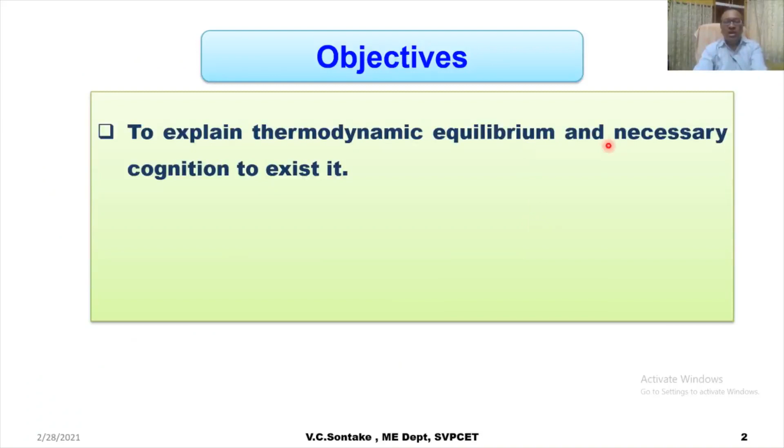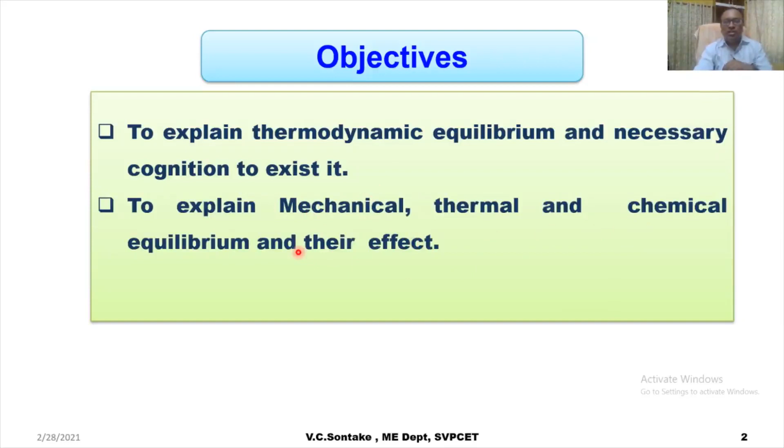The objectives of this video lecture are to explain thermodynamic equilibrium and the necessary condition for it to exist, and to explain mechanical, thermal and chemical types of equilibrium and their effect on the properties of a thermodynamic system. So let us start with thermodynamic equilibrium.

Now, before going into the detail of thermodynamic equilibrium, let us talk about the worldly meaning of equilibrium. In a simple sense, equilibrium implies a state of balance or no conflicts. For example, spiritually, when our heart, mind, body, and soul are all in a state of balance, the human being feels great peace because there is no conflict between these subconscious objects of the body.

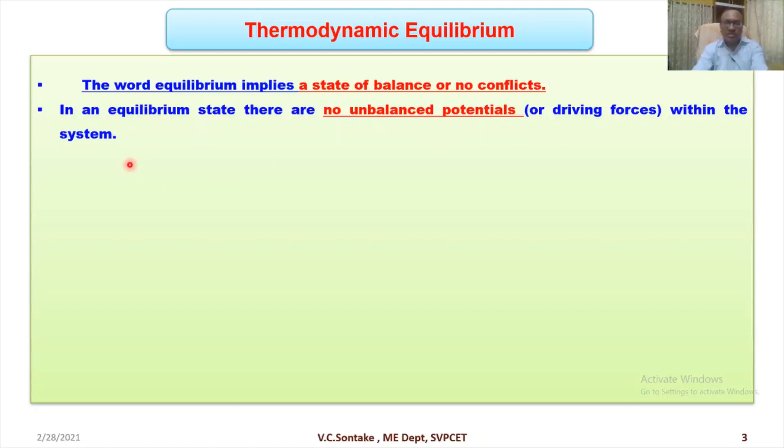So when I say equilibrium, it is a balance, no conflicts, nothing contradicting each other in that particular state. So in an equilibrium state, there are no unbalanced potentials or driving forces within the system, particularly a thermodynamic system.

A thermodynamic system exists in thermodynamic equilibrium when its macroscopic properties do not change if the system is switched from its existing state. That is, when it is moved or deviated from its existing state and no change in the macroscopic properties is observed, the system is said to exist in a state of thermodynamic equilibrium. Here, macroscopic properties are the properties which are observable in characteristics.

Thermodynamics particularly deals with the study of thermodynamic systems or different processes only when they exist in equilibrium states. Thermodynamics studies properties of those systems that are in equilibrium states only. The moment thermodynamic equilibrium does not exist, thermodynamic studies will not come into the picture.

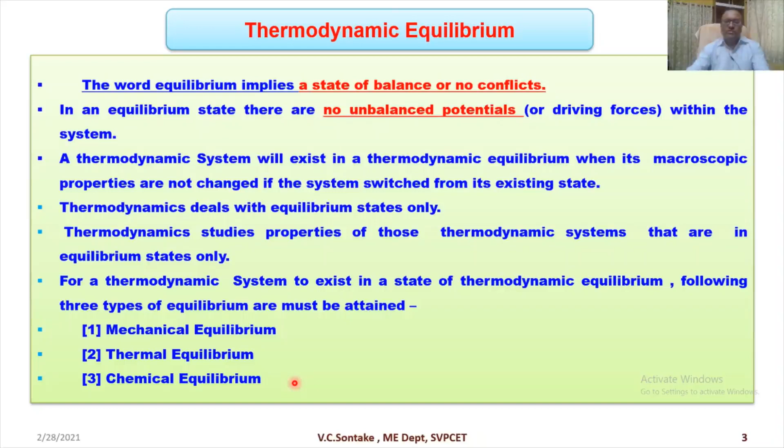For a thermodynamic system to exist in a state of thermodynamic equilibrium, three types of equilibrium must be attained: mechanical equilibrium, thermal equilibrium, and chemical equilibrium. A system is in thermodynamic equilibrium only when these three conditions are achieved. So let us discuss each type of equilibrium one by one. The first one is mechanical equilibrium.

In mechanical equilibrium, there are no unbalanced forces within the system itself, between two different systems, or between the system and its surroundings. If they are subjected to similar forces, with no unbalanced force, they are said to exist in a state of mechanical equilibrium. The pressure is the same at all points in the system, between two systems, or between system and surroundings, and does not change with respect to time.

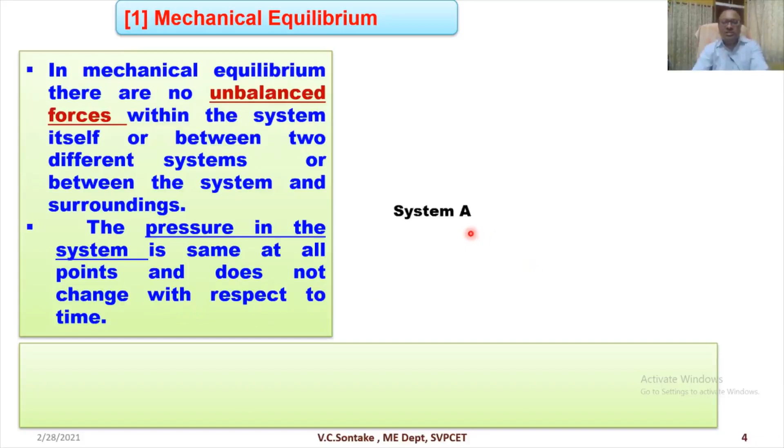For example, consider a system A where the pressure at different parts is 20 bar. So system A is in mechanical equilibrium. Similarly, if the parts of system B are at the same pressure, say 20 bar, it is also in mechanical equilibrium. If we bring A and B together, since pressures are the same, both exist in mechanical equilibrium. If they are exposed to surroundings at 20 bar, system A, system B and the surroundings will all be in mechanical equilibrium.

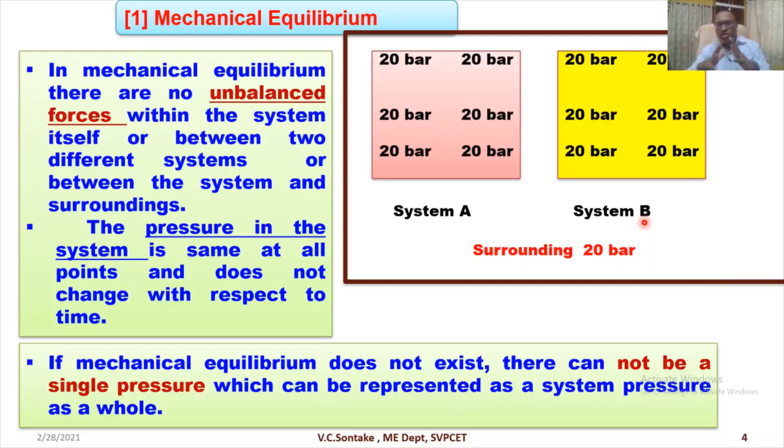Now what happens if mechanical equilibrium does not exist? Under such a condition, the system and surroundings or two different systems will be subjected to different pressures, and there cannot be a single pressure value representing the system pressure as a whole. There will be different pressure values.

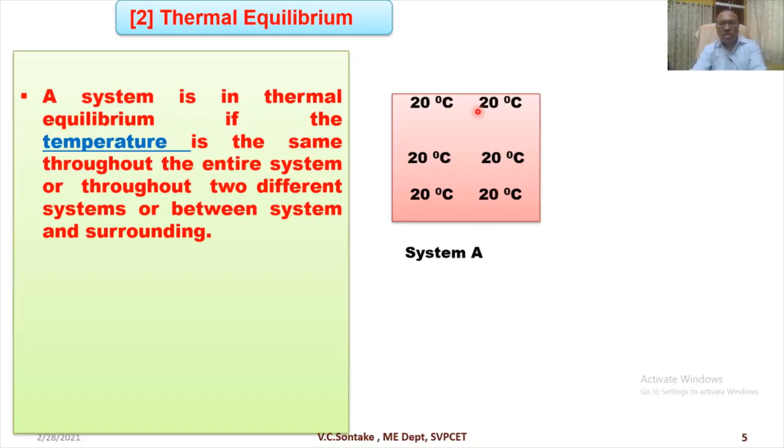The second type of equilibrium is thermal equilibrium. A system is in thermal equilibrium if the temperature is the same throughout the entire system, throughout two different systems, or between system and its surroundings. For example, in system A, the temperatures of different parts are the same at 20 degrees Celsius, so it is in thermal equilibrium with itself. If the parts of system B are at 20 degrees Celsius, it is also in thermal equilibrium with itself.

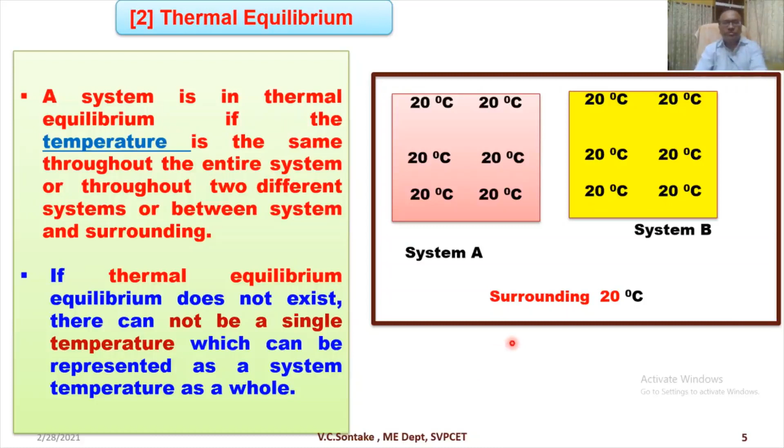System A and system B are also in thermal equilibrium, and if both are exposed to surroundings at 20 degrees Celsius, all three will be in thermal equilibrium. If thermal equilibrium does not exist, there cannot be a single temperature representing the system temperature as a whole; there will be different temperatures under thermal non-equilibrium. Now the last one is chemical equilibrium.

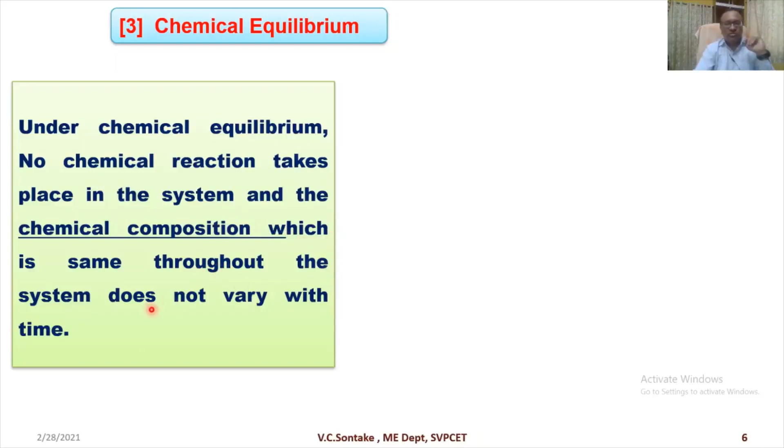Under chemical equilibrium, no chemical reaction takes place in the system and the chemical composition does not change and remains the same throughout. For example, if the chemical composition of system A is everywhere 20% by mass or by volume, it is in chemical equilibrium. If system B has the same composition everywhere, it is also in chemical equilibrium, and A and B are in chemical equilibrium with each other. If exposed to surroundings of the same composition, all three will be in chemical equilibrium.

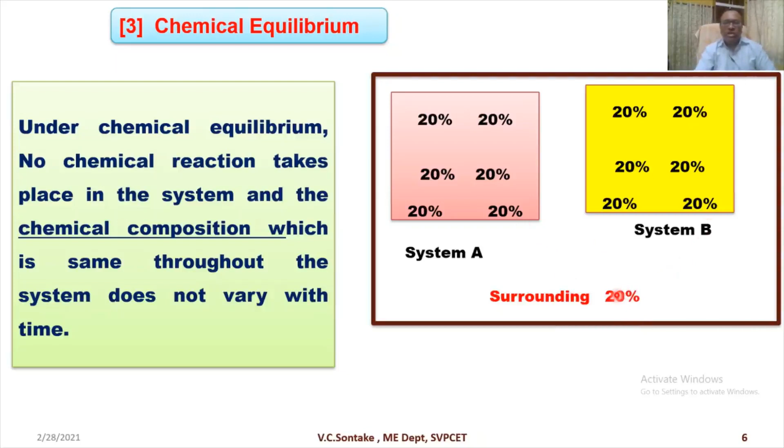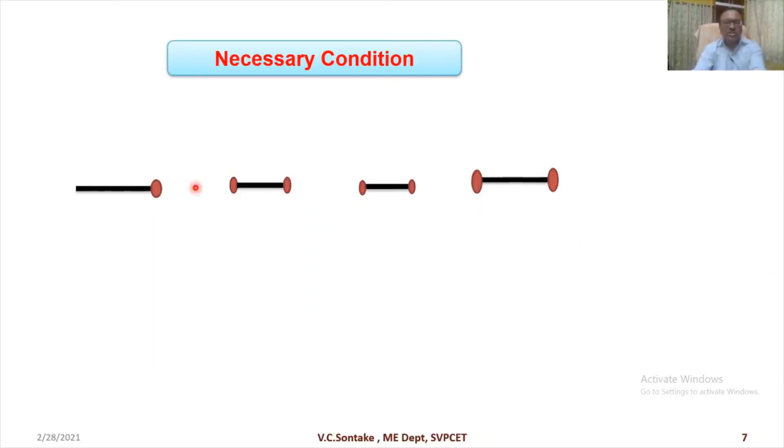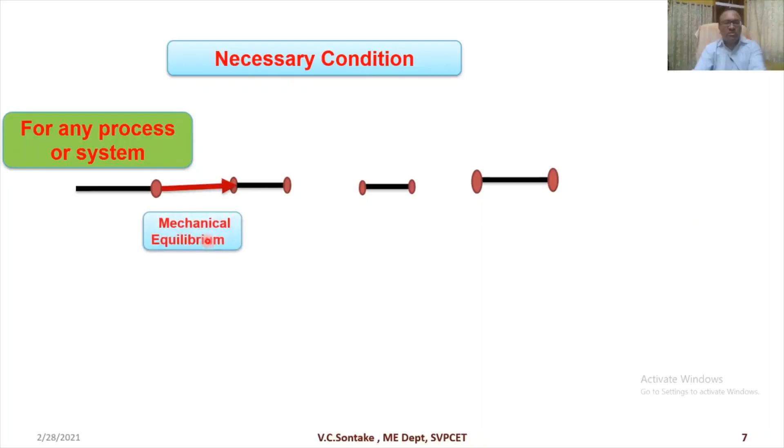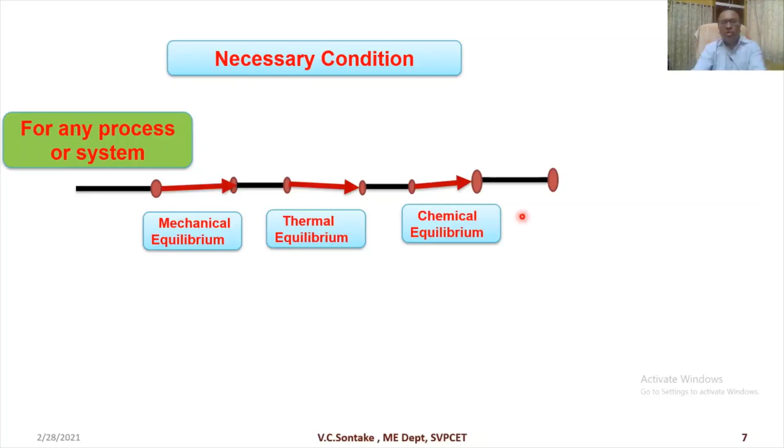So, what is the condition for thermodynamic equilibrium to occur? For any process or thermodynamic system to be in thermodynamic equilibrium, first the mechanical equilibrium condition, then the thermal equilibrium condition, and finally the chemical equilibrium condition must be satisfied. Only then will it be in thermodynamic equilibrium. This is the most necessary condition. If any of these conditions is not satisfied, the system or process cannot exist in thermodynamic equilibrium.

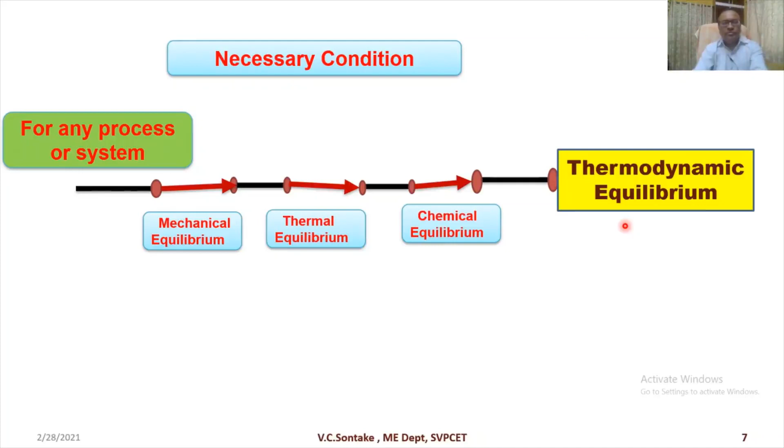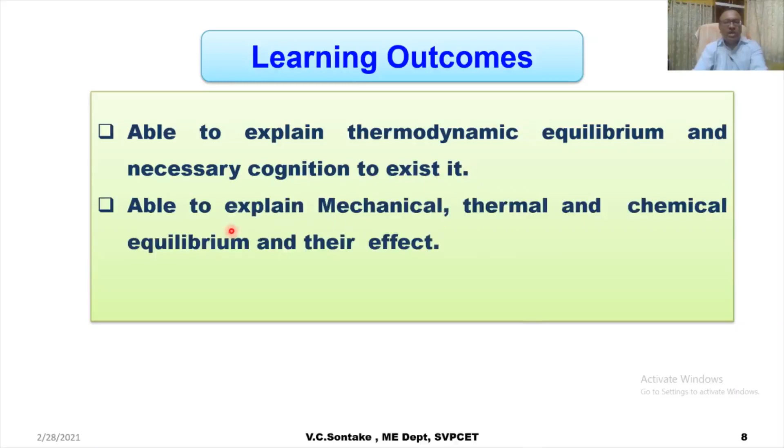So after watching this video, you will be able to explain thermodynamic equilibrium and the necessary condition for it to exist, and explain mechanical, thermal and chemical equilibrium and their effects.